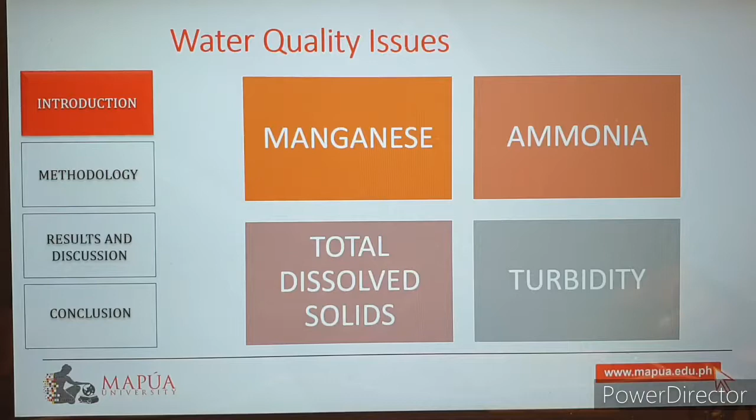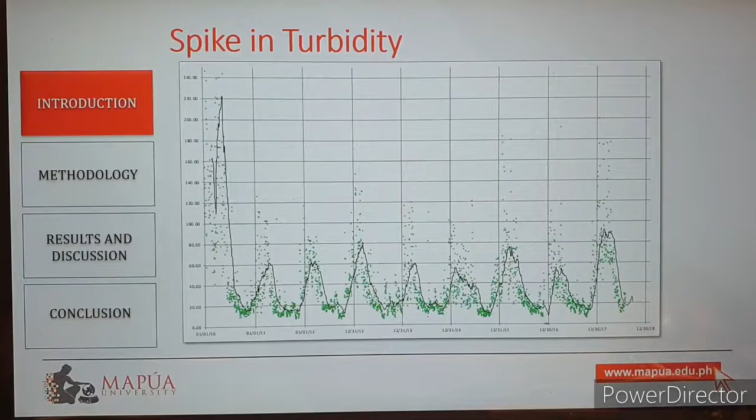The raw water from the source is subjected to rapid mixing, where coagulant is dosed. Coagulation process will start upon contact of the coagulant with the raw water. It will then pass through a tank where flocculant is added with slower mixing. Coagulated solids will form larger aggregates.

The raw water and the solids will enter the reaction zone where saturated air is dosed into the system, making the aggregate solids float. It will then be separated from the water by scraping, and the sludge will be collected for treatment and disposal. A portion of the treated water will be recycled back to the saturation zone, where air bubbles are formed through high pressure in the saturation tank. This makes an air-water system which will be used in the flotation of sludge in the reaction zone.

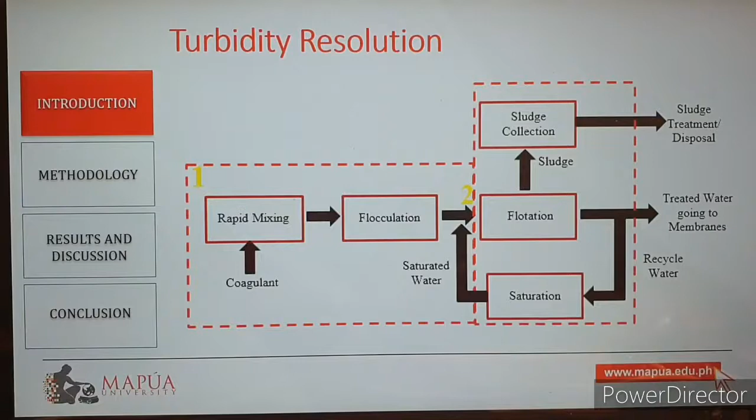Previous studies that determined the efficiency of DAF to treat high turbidity waters used pilot plants and experimental setups instead of full-scale plants. This has a significant difference, as the actual setup tends to have significantly lower efficiency due to turbulence and higher flow rate.

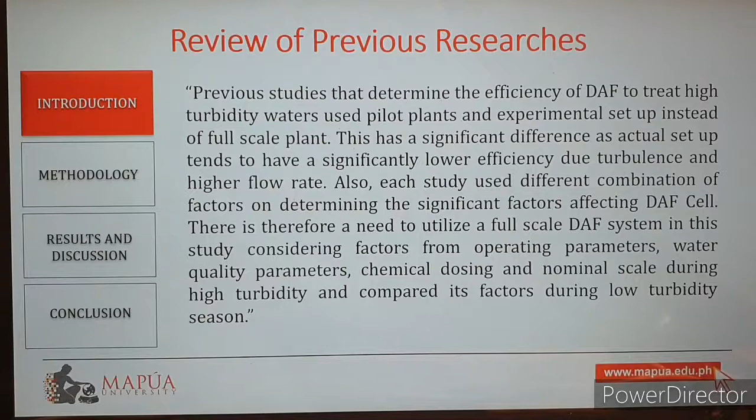Also, each study used a different combination of factors in determining the significant factors affecting DAF. There's therefore a need to utilize a full-scale DAF system in this study, considering factors from operating parameters, water quality, duration, and chemical dosing, and compare its factors during the normal and high turbidity seasons.

The first objective of the study is to formulate an optimization model of the dissolved air flotation performance for different turbidity conditions. Second is to test the model on actual conditions to determine its effectiveness for different turbidity conditions.

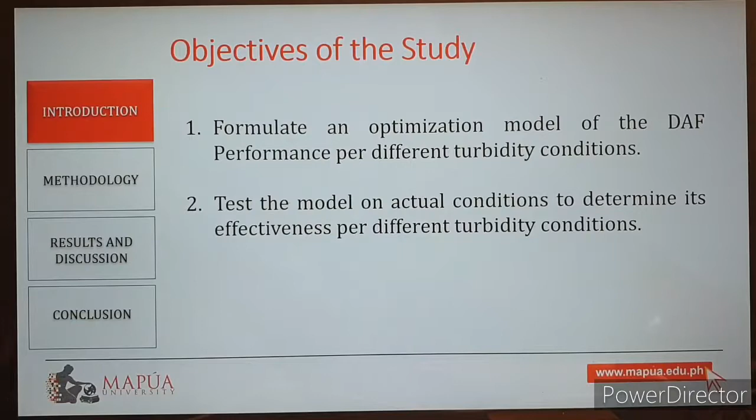For the significance of the study, it can be used as a benchmark for other wastewater treatment plants that use a dissolved air flotation system. The study focused on the existing dissolved air flotation system of Putatan water treatment plant. The study was limited to the records and forms available from the plant, and it was performed prior to and during the Amihan season, where turbidity values shot up.

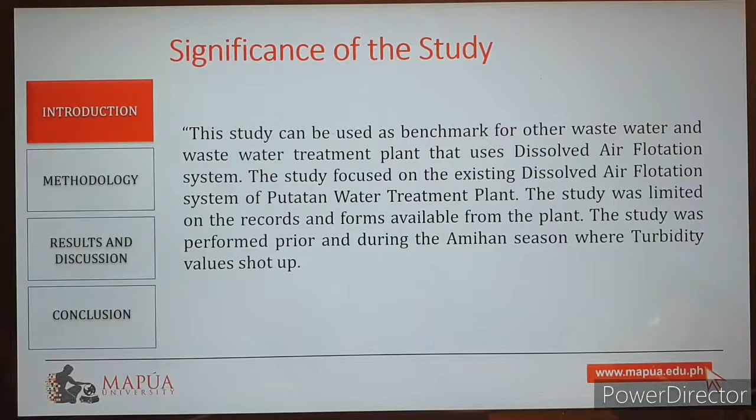In order to optimize a full-scale dissolved air flotation system, several items were prepared prior to the experimental runs. First, the scope of low and high turbidity was defined. Second, the factors that have significant impact on dissolved air flotation at different turbidity levels were identified.

This was done by performing cluster analysis and multiple regressions on the historical data. Cluster analysis was used to group the historical data into different conditions of turbidity, high and low. It is a method of grouping objects that are very similar, not only in one, but on several variables.

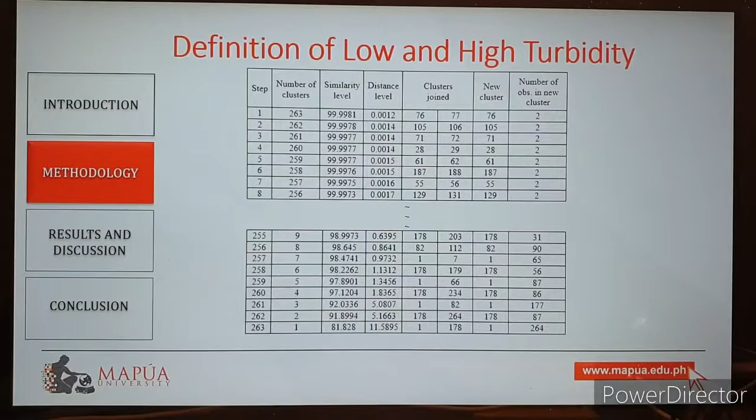Squared Euclidean distance was used as the distance metric, and the method was complete linkage. The jump in similarity level from steps 262 to 263 was the biggest among the steps, which is 10.071%, and therefore it was chosen as the number of clusters, which is 2 clusters.

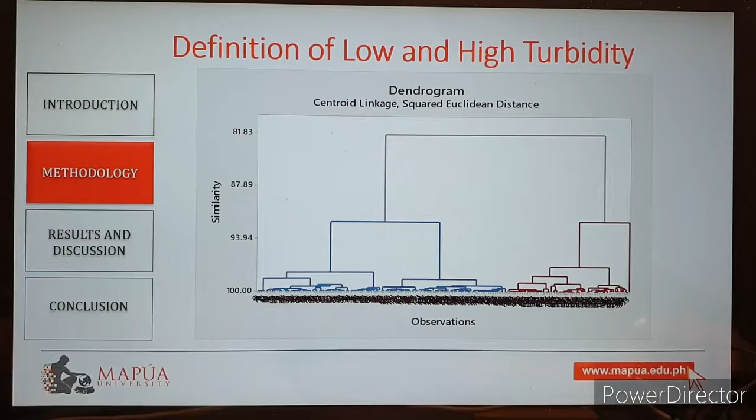There was no literature showing the distinct differences between low and high turbidity values. However, several studies suggested that around 200 NTU turbidity was already considered high. Therefore, 181 NTU was accepted as the lower limit for the high turbidity cluster. This definition of low and high turbidity was used for the rest of the experiment.

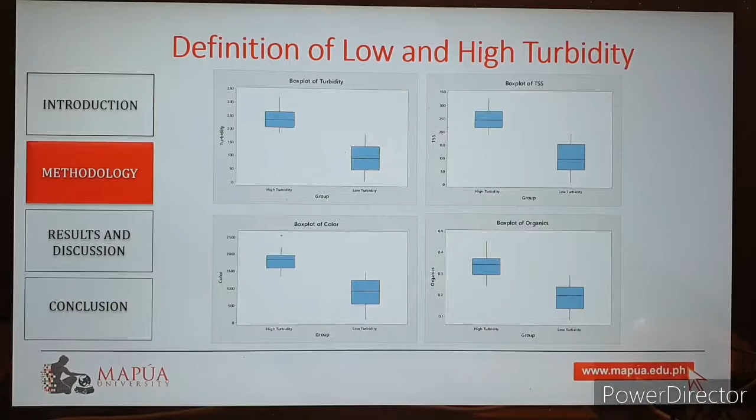Upon identifying the limits of turbidity level, multiple regression was performed for both clusters to determine significant parameters. As mentioned previously, parameters used to optimize dissolved air flotation cells vary from study to study. Some use water quality and chemical dosing, like Olshani et al. did using oil-water emulsion. Some focus on operating parameters of dissolved air flotation, such as what Rubio et al. mentioned. Others combined water quality, chemical dosing, and operating parameters, such as Misami and Caseylan, Edwards et al., Palaniandi et al., and Bickerton, stated to be able to account for the effect of various factors. Inlet water quality factors, chemical dosing factors, and dissolved air flotation operating parameter factors were included in the multiple regression.

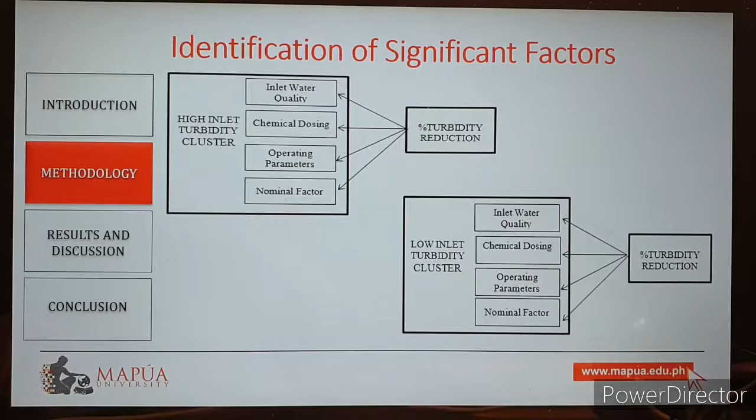To account for the difference in human behavior during morning shift and night shift, a nominal factor, which was time per shift, was added to the regression.

Aside from turbidity, there are 11 inlet water quality parameters included. First is the oxidation reduction potential. It's the potential that an oxidation and reduction reaction occurs. The level of oxidation reduction potential will define what form of chemicals exist in the raw water.

Second is total dissolved solids. It's a measure of the dissolved combined content of all substances present in the water that are smaller than 0.45 microns in molecular or ionic form.

Third, salinity, is a measure of the amount of salts present in the raw water. Fourth, conductivity, is the ability of the raw water to conduct an electrical current with dissolved ions as the conductors. Fifth, in contrast with total dissolved solids, is the measure of solids present in the water that cannot pass through the 0.45 micron filter.

Sixth, ammonia, usually in the form of ammonia nitrogen, exists in water via natural liquefaction, domestic and industrial effluents, and sludge discharge. It produces taste and color issues in the water and reduces dissolved oxygen in the aquatic system.

Seventh, manganese, also exists in water via natural liquefaction, domestic and industrial effluents, and sludge discharge. It produces discoloration, metallic taste, and odor in the product water, and clogging in pipes.

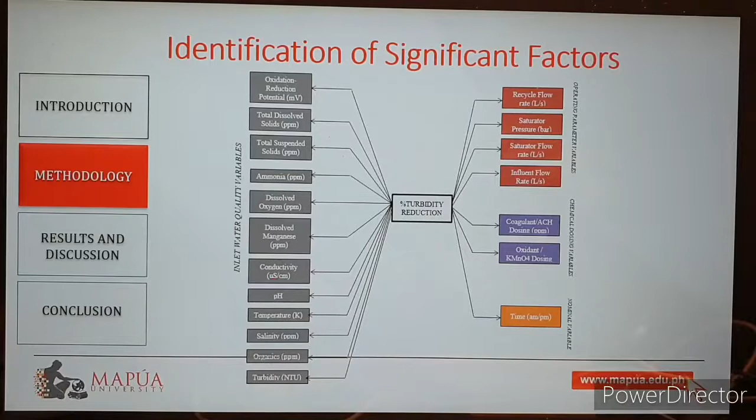From table 4.2.1, the p-value for TSS is equal to 0.578. Color is equal to 0.965. Organics p-value is 0.098. Total dissolved solid p-value is equal to 0.447. Salinity p-value is 0.363. Conductivity p-value is 0.945. ORP p-value is 0.927.

Ammonia p-value is 0.366. Dissolved manganese p-value equals 0.388. Saturator pressure p-value is equal to 0.159. Saturator flow rate p-value is equal to 0.436, and time p-value is equal to 0.078. These were all larger than 0.05. This means that they had no significant effect on percent turbidity reduction. These variables will therefore be removed in running the design of experiment.

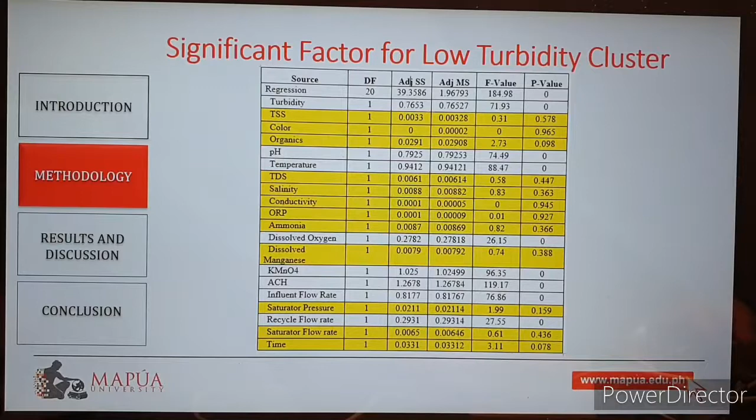After removing these parameters, the second multiple regressions were executed. The ANOVA is as follows. From table 3, all the parameters were shown to have p-values lower than 0.05. Therefore, for the factorial experiment on the low turbidity cluster, 8 parameters were used: turbidity, influent flow rate, pH, temperature, dissolved oxygen, potassium permanganate dosing, ACH dosing, and recycled flow rate.

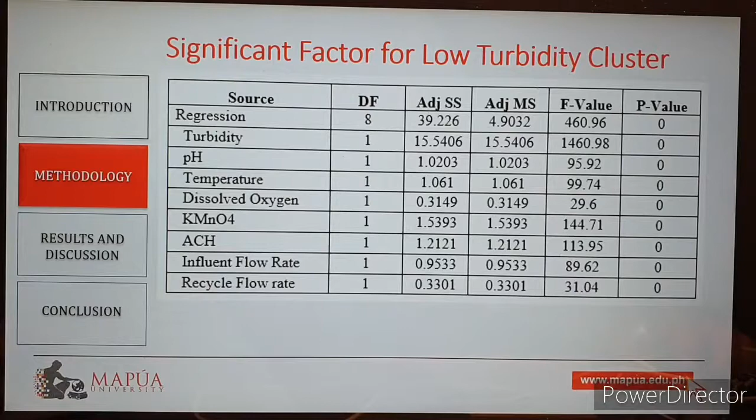For the high turbidity cluster, below is the ANOVA from the initial run. From table 4, the p-value for turbidity is equal to 0.661. TSS is equal to 0.988. Color p-value is 0.756. Organics p-value is 0.992. pH p-value is 0.136. Temperature p-value is 0.244. Salinity p-value is 0.584. Conductivity p-value 0.61. ORP p-value 0.499.

Ammonia p-value 0.598, dissolved oxygen 0.354, potassium permanganate 0.338, ACH 0.937, saturator pressure 0.439, recycled flow rate 0.863, saturator flow rate 0.295, and time 0.367 were all larger than 0.05. This means that they had no significant effect on percent turbidity reduction. These variables will therefore be removed in running the design of experiment.

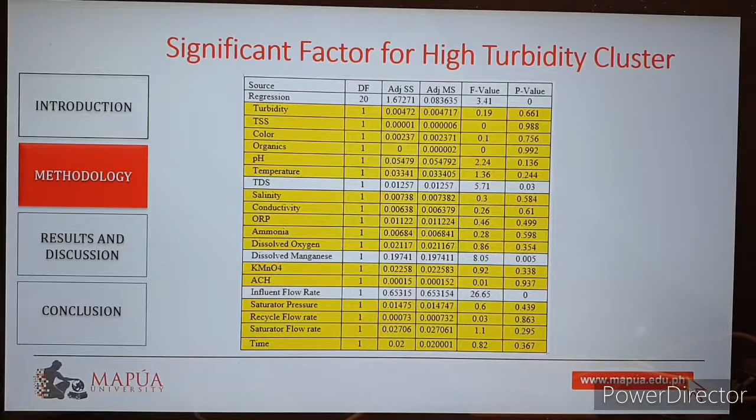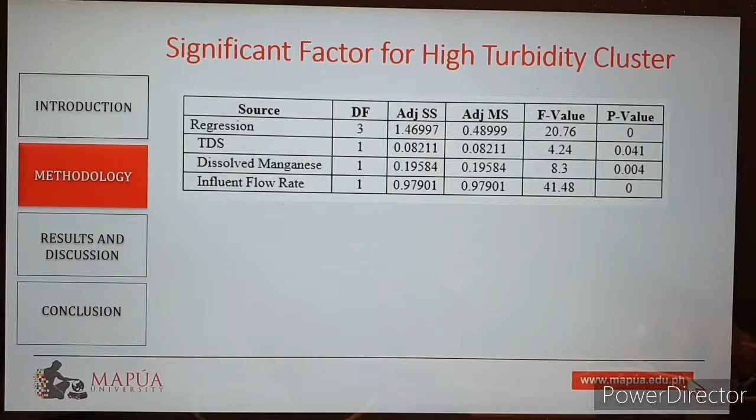Upon removing these parameters, another round of regression was performed. The ANOVA is as follows: ANOVA table for the stepwise multiple regression of the turbidity cluster. From table 5, all of the parameters are shown to have p-values lower than 0.05. Therefore, for the factorial experiment on the high turbidity cluster, 3 parameters were used: total dissolved solid, dissolved manganese, and influent flow rate.

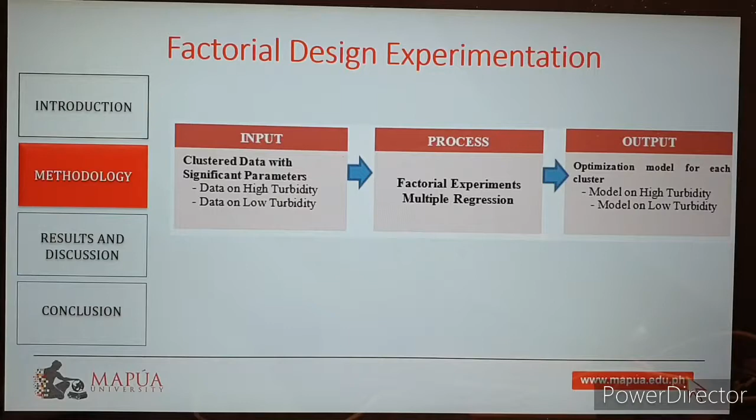Upon establishing the factors that will be used for optimization for both clusters, the objective of this paper can now be achieved by performing factorial design experimentation on each cluster and by verifying the accuracy of the model. For the low turbidity cluster with 8 factors, a fractional factorial design is used with 1 replicate for each treatment. First, there's only limited time for the runs, and second, there are some factors that are not controlled but we have to wait for them to happen, like inlet water quality parameters. Resolution IV was chosen, a 1/8 fraction with 32 runs.

The values of the factors are based on the lowest and highest recorded values of each factor in the low turbidity cluster. The experiment was performed from December 1, 2018 to January 3, 2019. The experiment was done in the actual DAF cell, and measurements were done in the lab for the water quality and checking the flow meter for the flow rates. The results were encoded in Minitab for multiple regression.

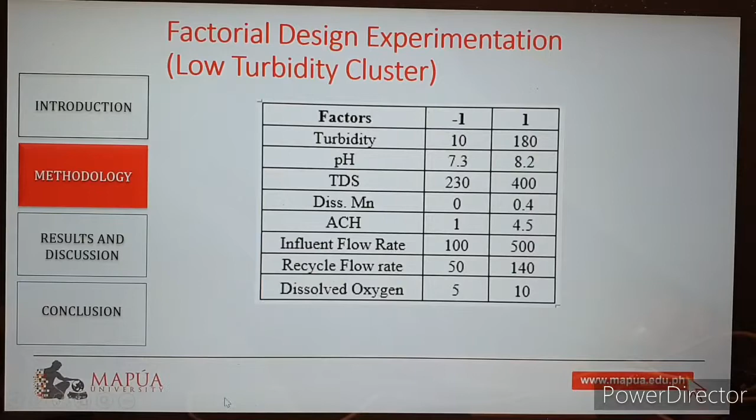For the high turbidity cluster with three factors, a full factorial design was used with one replicate for each treatment, as there is only limited time for the runs. There are some factors that are not controlled, but we have to wait for them to happen. A design was chosen with 8 runs. The experiment was performed from December 1, 2018 to January 1, 2019. The experiment was done in the actual DAF cell, and measurements were done in the lab for the water quality and checking the flow meter for the flow rates. The results were then encoded in Minitab for multiple regression.

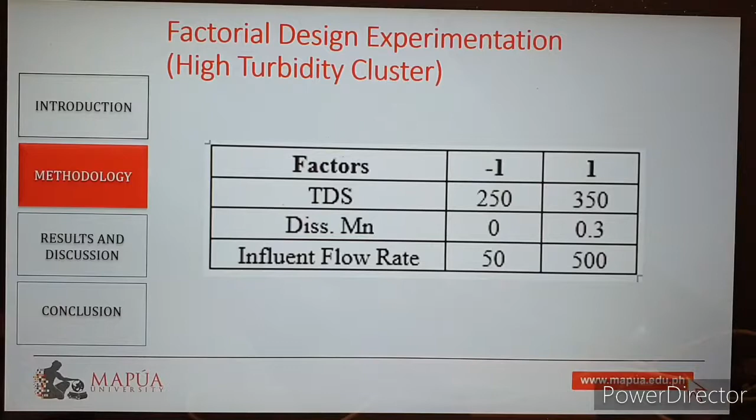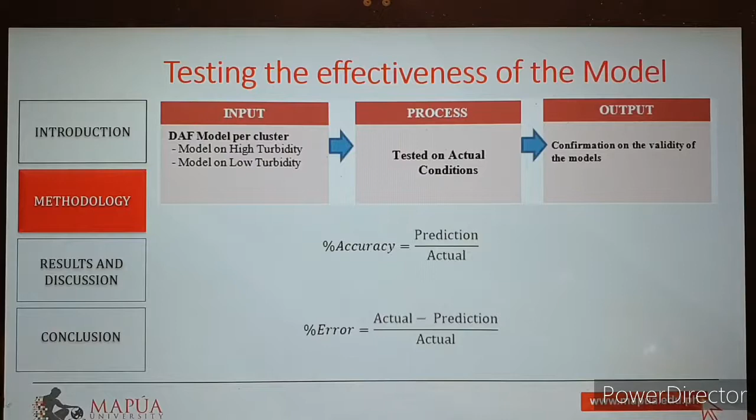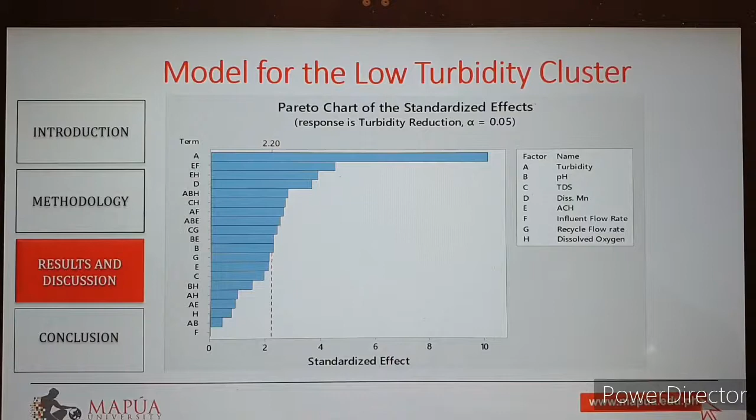And here is the ANOVA table calculated from the experiment. The items highlighted in yellow were the factors that have p-value greater than 0.05. This means that at 95% confidence level, they had no significant effect on the percent turbidity reduction at low turbidity cluster. It must be noted, however, that since the model was hierarchical, the values must be retained.

The top four factors, turbidity 46.08%, ACH influent flow rate 9.08%, ACH dissolved oxygen 6.71%, and dissolved manganese 5.98%, constitute 68.09% contribution to the percent turbidity reduction. At low turbidity, percent turbidity reduction was more sensitive to changes in turbidity. Given the equation of turbidity reduction and that the final turbidity was the same, increasing the initial turbidity would increase the total percent turbidity reduction.

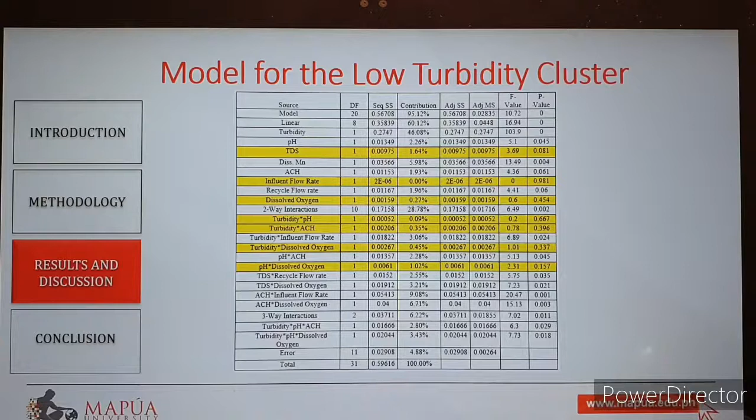The relationship of ACH and influent with regards to turbidity reduction was the effectiveness of coagulation through rapid mixing. ACH was injected to the influent and coagulation was induced through the high flow rate of the influent. A good combination of the flow and chemical dosing would lead to improvement in turbidity reduction.

The relationship of ACH and dissolved oxygen with regards to turbidity reduction was the effectiveness of coagulation and duration. High dissolved oxygen in the system would mean that the coagulated particles can be easily floated in the tank. The effect of dissolved manganese with regards to turbidity reduction was on the formation of manganese dioxide. High dissolved manganese results in color and added to the turbidity of the system.

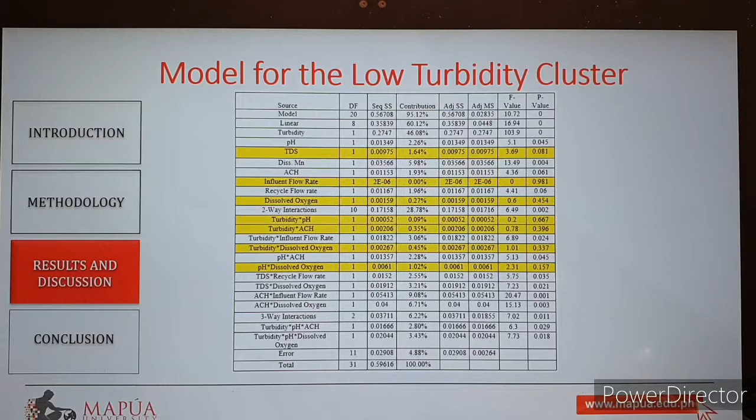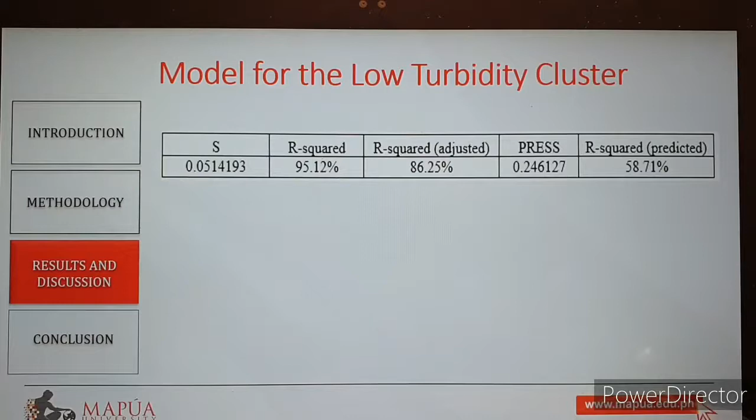Based on the results of the coefficients in the table above, R squared is equal to 95.12%, which means that there are smaller differences between the observed data and the fitted values. The regression model for the low turbidity cluster is shown in this slide.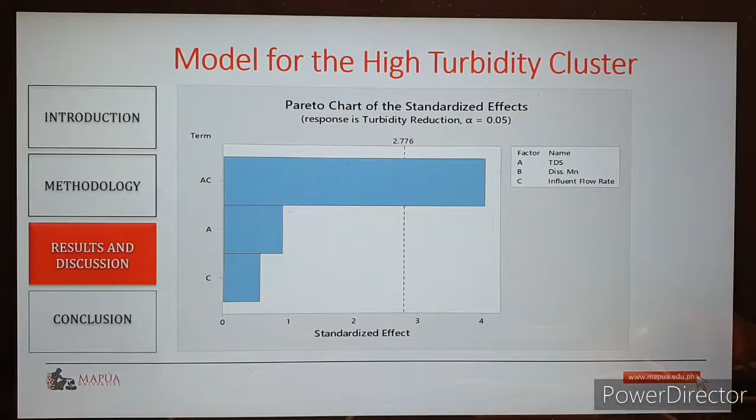Only total dissolved solids and influent flow rate are shown in the graph because the effect of the dissolved manganese is omitted, as the effect is insignificant as well as its interaction to percent turbidity reduction. The items highlighted in yellow are the factors that have p-value greater than 0.05. This means that at 95% confidence level, they have no significant effect on the percent turbidity reduction at the high turbidity cluster. As it can be seen, almost all except for the interaction of TDS and influent flow rate show no significant effect to percent turbidity reduction.

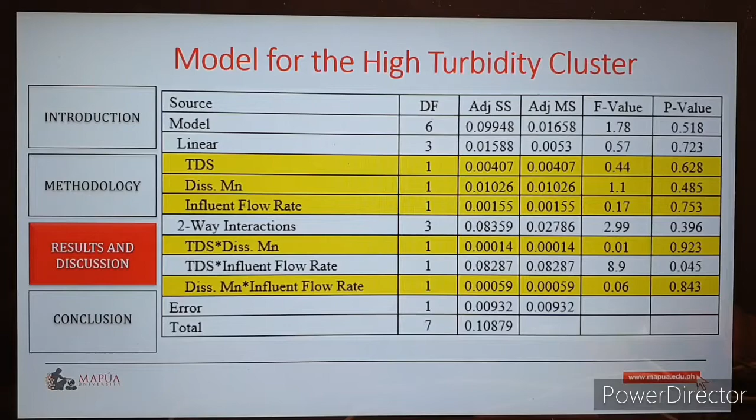It must be noted, however, that since the model is hierarchical, the TDS and the influent flow rate must be retained. On the other hand, we can remove the dissolved manganese factor as well as its interaction. Another run for ANOVA was performed without the dissolved manganese, and this is the result. The table shows that the TDS and influent flow rate still have no significant effect, but due to their interaction are still retained in the model.

At high turbidity, only a handful of parameters have effect on turbidity reduction as the capacity of dissolved air flotation is already reached. The saturators are clogged and the air could not push the solids upward, which caused the sludge to sink to the floor. The only parameter in the experiment that showed a significant effect is the joint interaction of TDS and influent flow rate. The combination of TDS and influent flow rate accounts for the rate of dosing ionic salts in DAF.

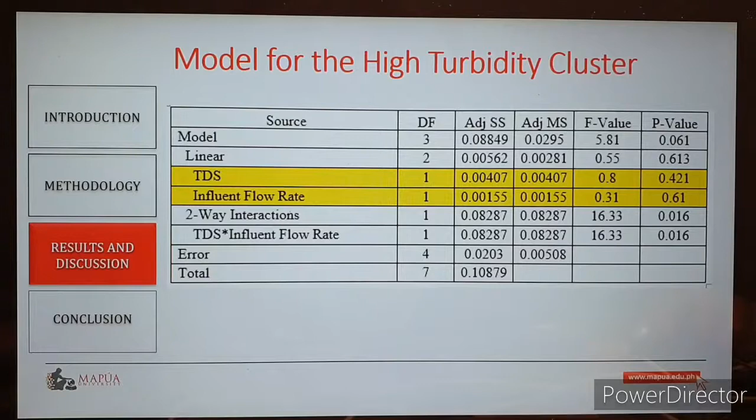At high turbidity, the level of air to solids ratio is very much affected because during these conditions, the denominator is much higher than the numerator, and the presence of TDS has significant effect on the solubility of air in the water. This results in a much lower air to solids ratio and lower percent turbidity reduction.

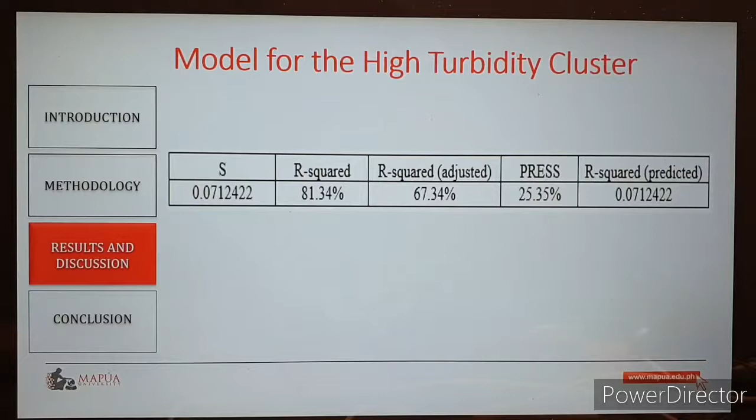Based on the results of the coefficients of the table above, R squared is equal to 81.34%, which means that there are smaller differences between the observed data and the fitted values. And this is the regression model for the high turbidity cluster.

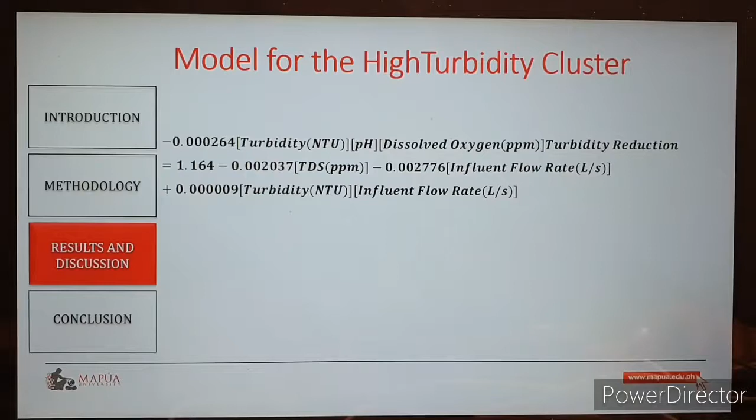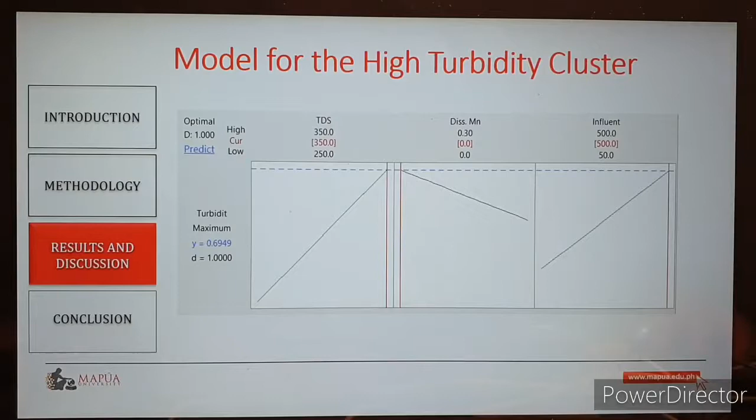The model shows high accuracy in predicting the actual values with percent difference ranging from 0.42% to 14.12%, with an average of 7.4% for 70 samples. Accuracy ranges from 85.88 to 99.58% with an average of 92.6%.

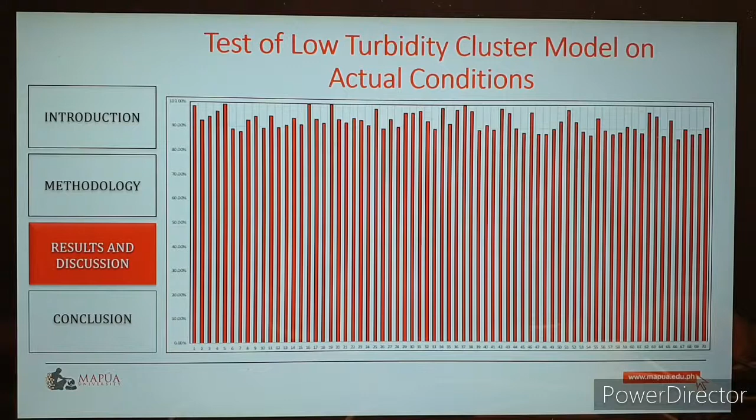For the high turbidity cluster, only 8 samples were tested as the amihan season was already finished and turbidity values entering the plant fall mostly in the low turbidity cluster. The model shows high accuracy in predicting the actual values with percent difference ranging from 7.78% to 16.77%, with an average of 11.88% for 8 samples. Accuracy ranges from 83.23% to 92.22%, with an average of 88.12%.

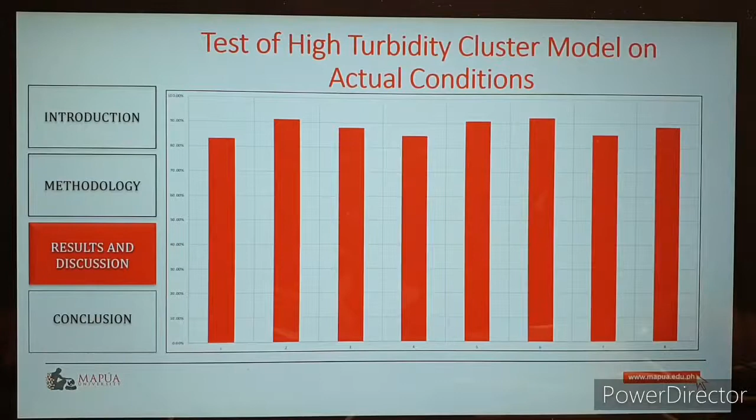As can be seen in the table, the p-value, which is equal to 0.124, is greater than 0.05. Therefore, at 95% confidence, we accept the null hypothesis that the means are not significantly different, proving the validity of the model.

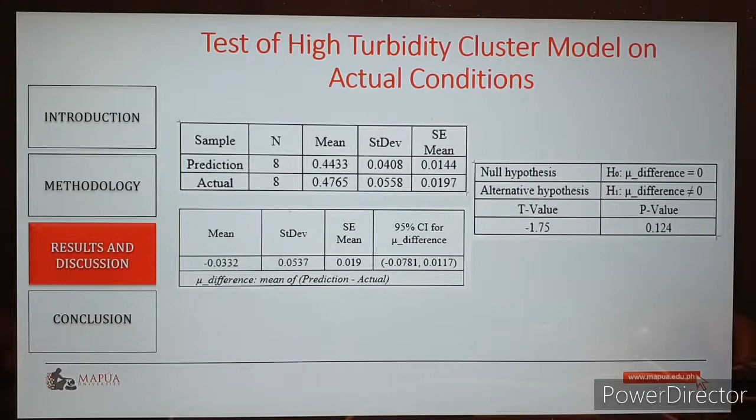The study confirms the difference in the efficiency of dissolved air flotation system at different turbidity levels. Using cluster analysis, water quality data from June 2017 to November 2018 was separated into 2 groups: low turbidity cluster containing influent with turbidity values ranging from 0 to 181 NTU, and the high turbidity cluster containing influent with turbidity values ranging from 182 to 323 NTU. Result of the t-test showed that the following parameters have a significant difference, p-value less than 0.05, between clusters: turbidity, TSS, color, organics, temperature, and ammonia.

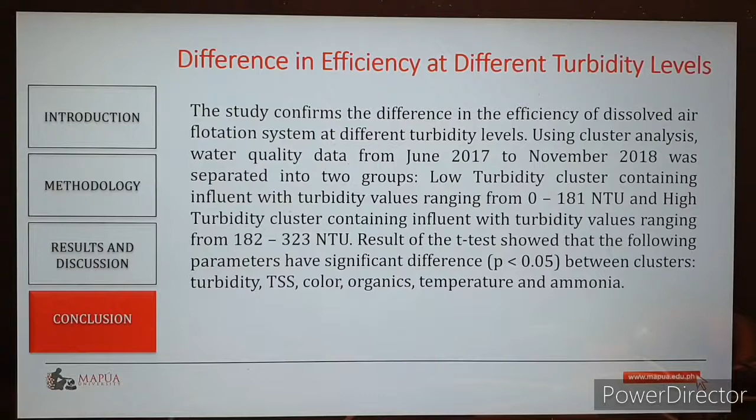For the low turbidity cluster, 5 main factors, 6 two-way interactions and 2 three-way interactions showed significant effect in the percent turbidity reduction. The regression model generates an R squared equal to 95.12%. The residual plots support the validity of the model.

From the model, the ideal setting, where percent turbidity reduction is greater than 80%, was calculated: turbidity is 10 NTU, pH 8.2, TDS is at 400 ppm, dissolved manganese is 0, ACH dosing is 1 ppm, influent flow is 497.17 liters per second, recycle flow rate is at 50.01 liters per second, and dissolved oxygen is 8.88 ppm.

For the high turbidity cluster, only one two-way interaction shows significant effect in the percent turbidity reduction. The regression model generates an R squared equal to 81.34%. The residual plots support the validity of the model. So from the model, the ideal setting, where percent turbidity reduction is greater than 80%, was calculated when TDS is 350 ppm, dissolved manganese is 0 ppm, and influent flow rate is at 500 liters per second. This was already the maximum setting. However, the maximum percent turbidity reduction that was reached was 69.4%.

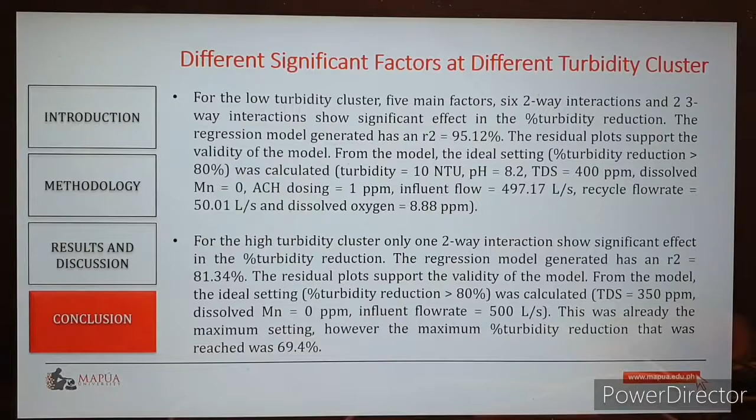For the low turbidity cluster, 70 samples were gathered. Data showed that there was 92.6% accuracy on the predictions. A paired t-test proved that the means of the prediction and the actual were not significantly different. For the high turbidity cluster, only 8 samples were gathered due to the low turbidity entering the plant. Data showed that there was 88.12% accuracy on the predictions. A paired t-test proved that the means of the prediction and the actual were not significantly different.